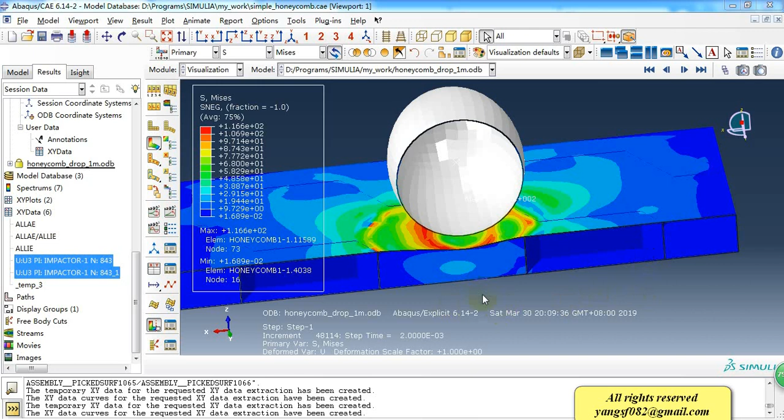Hello everyone. Today I want to share a simulation of the impact of honeycomb box. As we can see, this is a rigid object as impactor, and this box is a honeycomb structure inside.

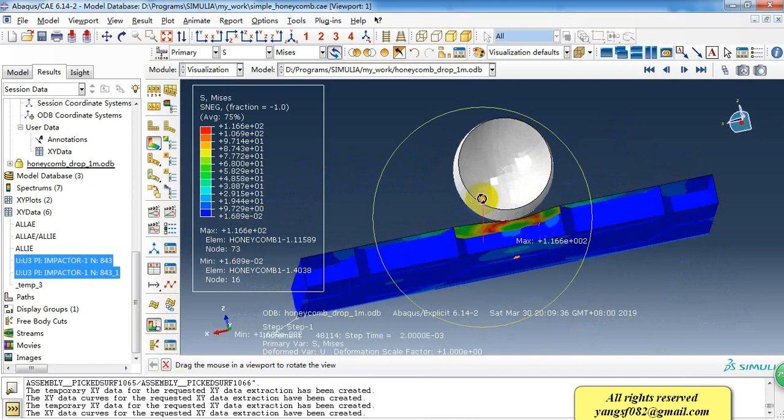And I can show you the inside structure. So this is the deformation and the stress distribution. Then let me show you how to create this model and simulation.

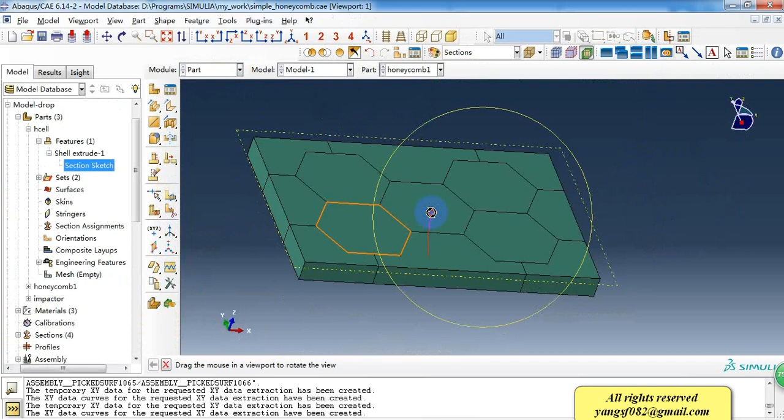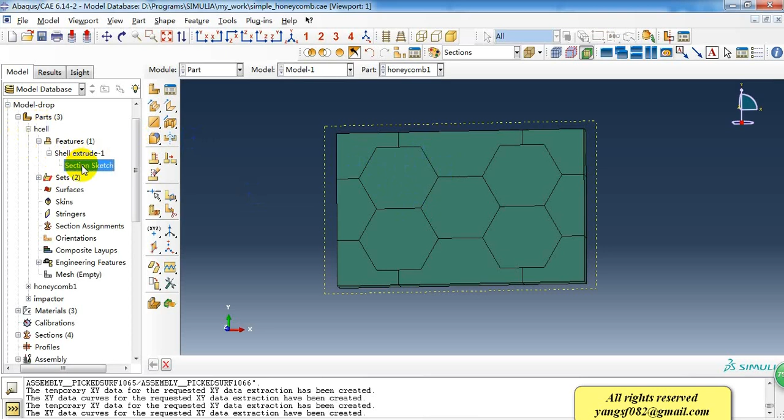So this is a part, and how to create this part, I can tell you the steps. First, we need to create a unit of the polyhedron. So this is the unit, and here is the sketch of the honeycomb unit.

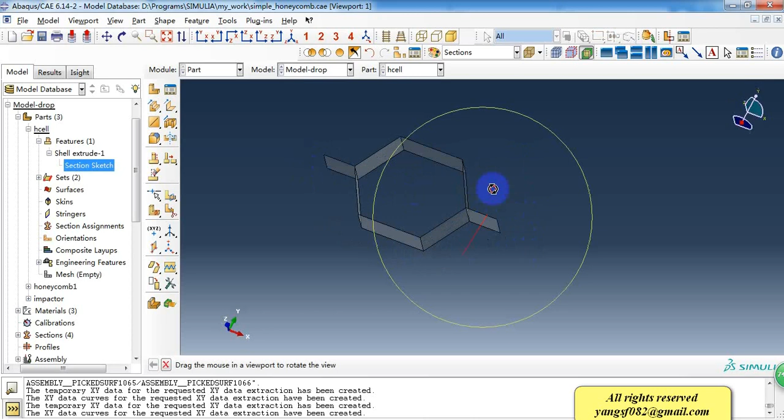And the dimension here. So we use the extrude tools to create this surface, and then we can make a merge of multi-units, so we can get this one.

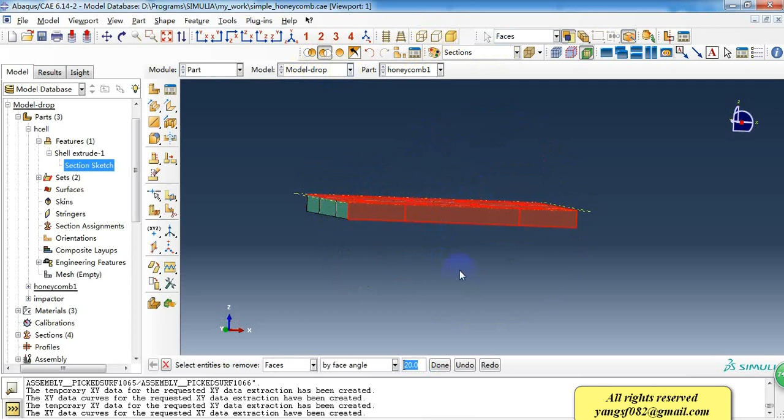Before I add the surfaces at the outside, it's just as this, and the thickness of the walls are different because we know how the honeycomb is made.

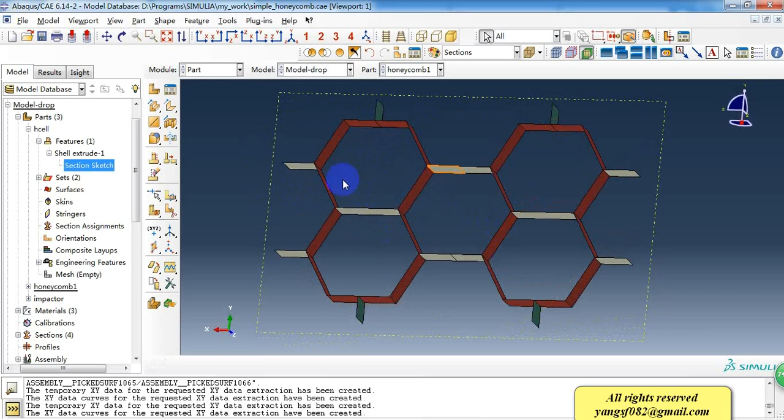So this wall's thickness is 2 times as this one, and I can show you the thickness of the walls.

And the thickness I can show you in this section. So this is a double wall, and this is single wall. The double wall is 2 millimeters, and the single wall is 1 millimeter.

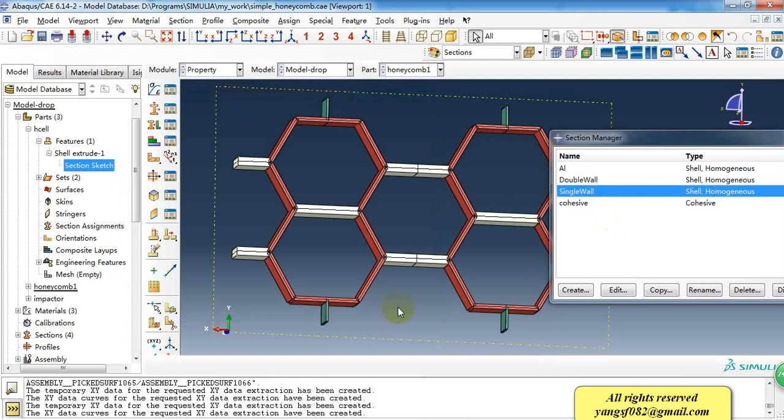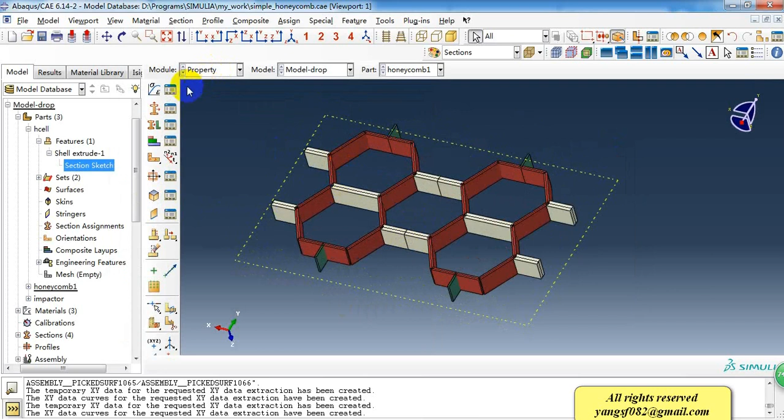After we get this honeycomb, then we need to create the outer surface. So first of all, we need to extrude the outside wall. So that's the step here.

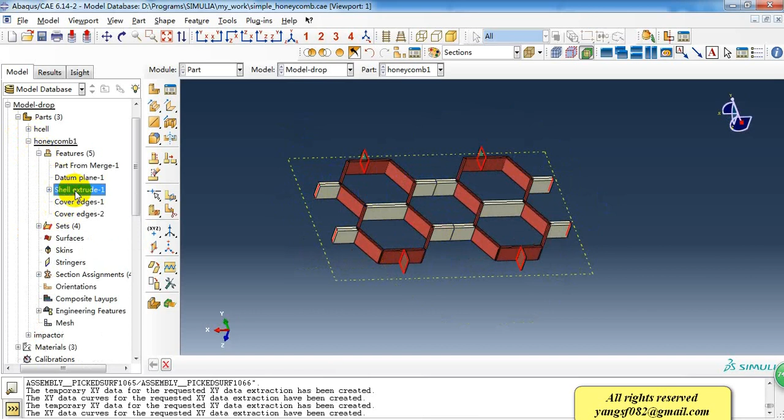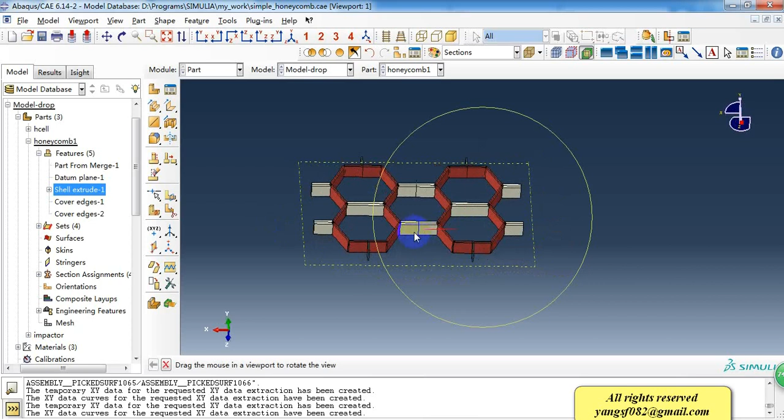In the sketch, we create a rectangle as the outside wall and extrude it for 6 millimeters, the same height as the honeycomb. After this, we need to create the top and bottom surface.

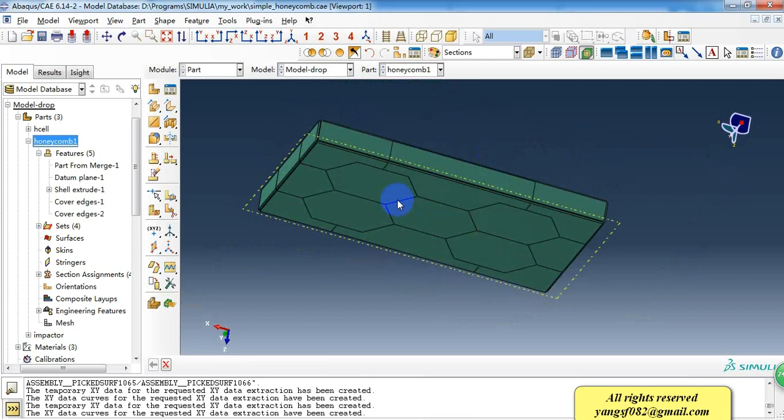We can create the surface by this tool, Cover Edges. After we created the top surface and bottom surface, then it is a closed box, and inside is the honeycomb structure. So this is the honeycomb box.

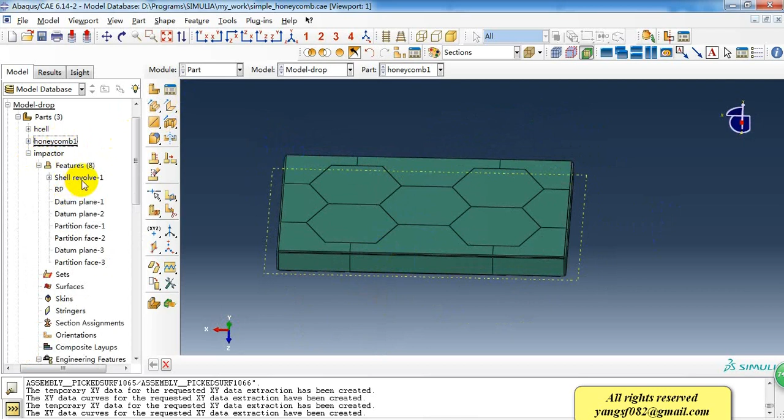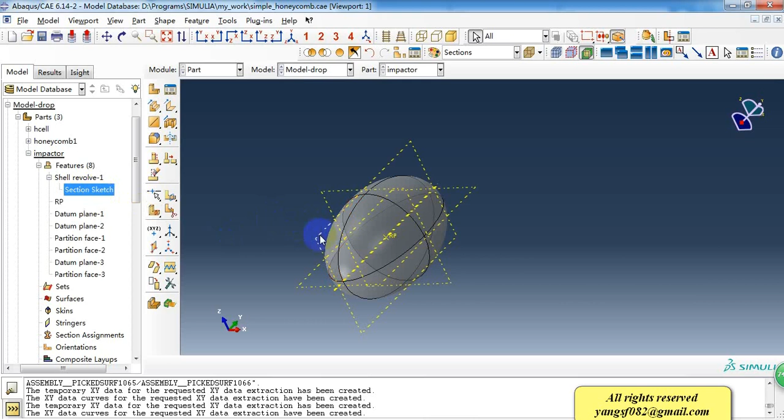Then we create the impactor. It is an ellipse, so I need to revolve it to get the sphere body. And the long axis is 30 millimeters. After revolving for 360 degrees, then we get the closed surface, and we create it as a discrete rigid.

So we need to give it a reference point here. Then to get the uniform mesh, we cut it with 3 planes. So we create the 3 datum planes.

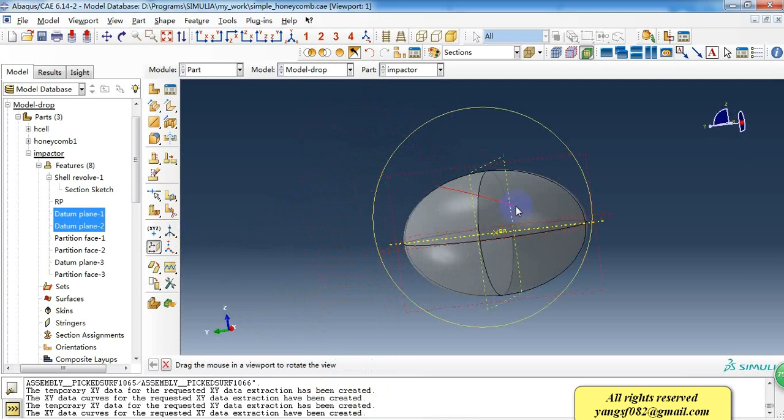As we can see, these planes can be created by these tools. So after we cut it into 8 parts, we can get a better mesh, as we can see.

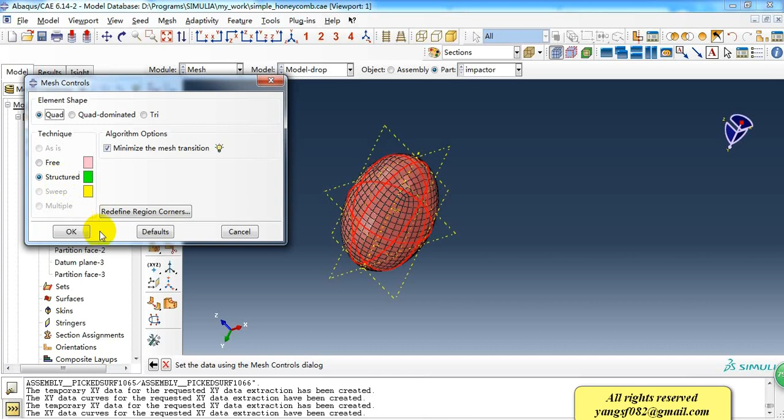And for this rigid sphere body, we can get a structured mesh. And the mesh size is about 1.5 millimeters.

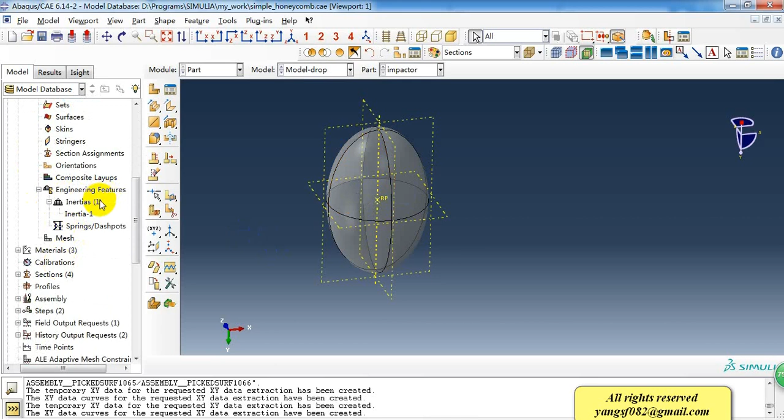Because it is a rigid body, it needs a mass for this object. So I give it engineering features, inertia. And for this reference point, it has a mass of 0.05 kilograms. It's just almost the mass of an egg.

So these are the 2 parts. Then we need to create material. Here we create 2 materials. And the first is the aluminum density and plastic property.

The yield stress is about 120 megapascals.

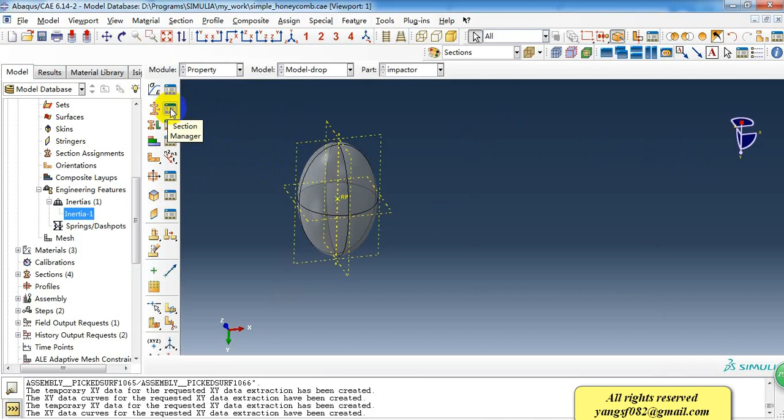So after we create these 2 materials, we need to create the sections. Because these are all shell sections, we need to create different section properties for different thickness.

As we can see, the aluminum has a thickness of 0.5 mm, and the double wall of the honeycomb is 2 mm, and the single wall is 1 mm. These are the three section properties we need to use.

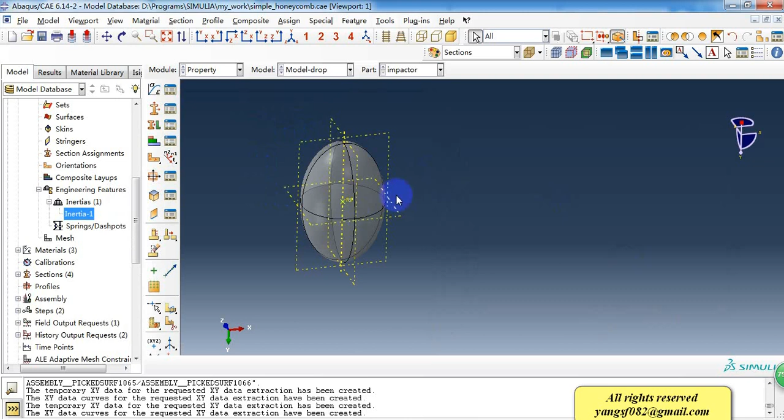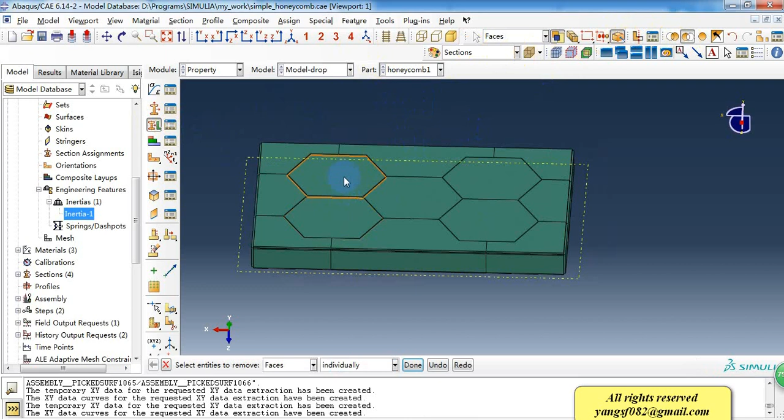Then we need to assign the section to different thickness surfaces. So I can hide this top surface to see the inside thickness.

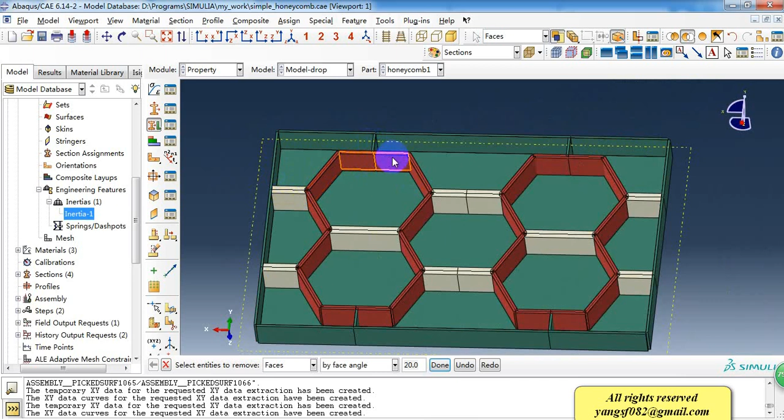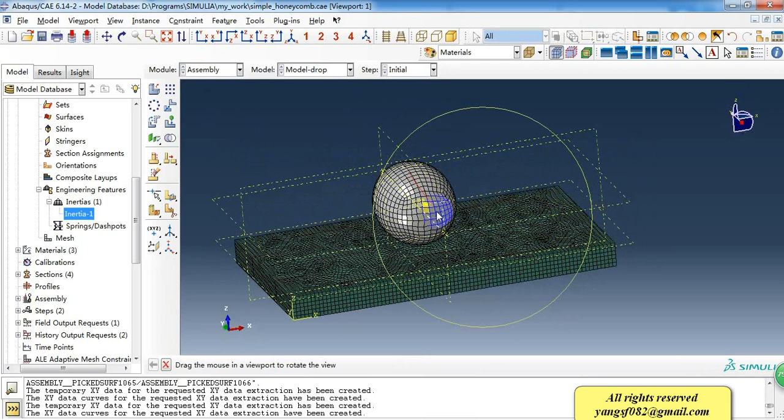After we assign the section property, we go into the assembly module. In this module, we need to adjust the location of the two parts and make it the initial position of the simulation.

Then we create a dynamic explicit step, and the time period is 2 milliseconds.

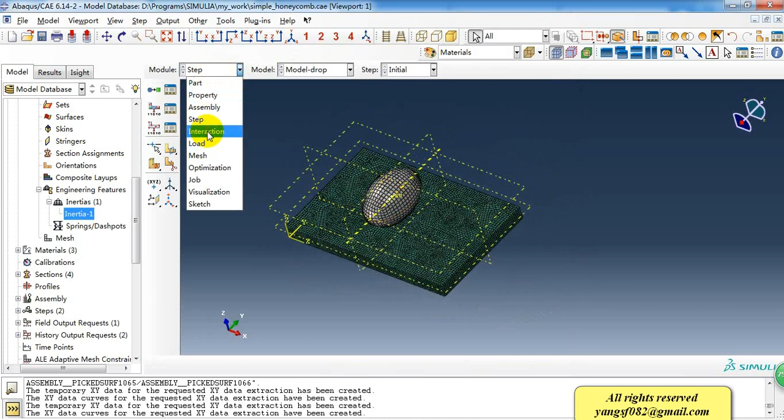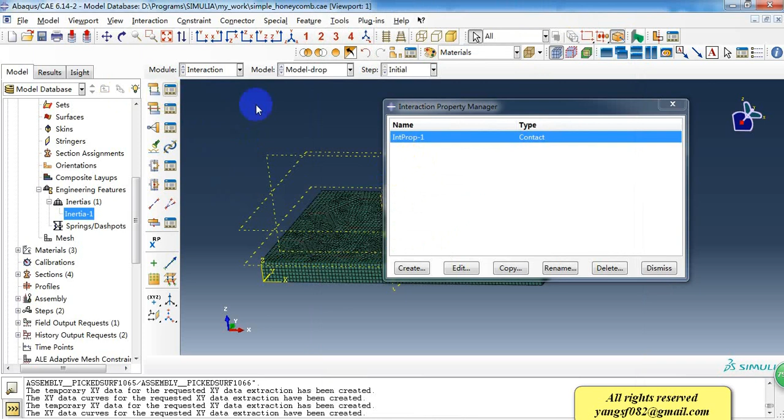Because there is a contact in the process of impact, we need to create a contact property with a friction coefficient of 0.5, and we create a surface-to-surface contact interaction. The rigid body has a master surface, and the top surface is the slave surface.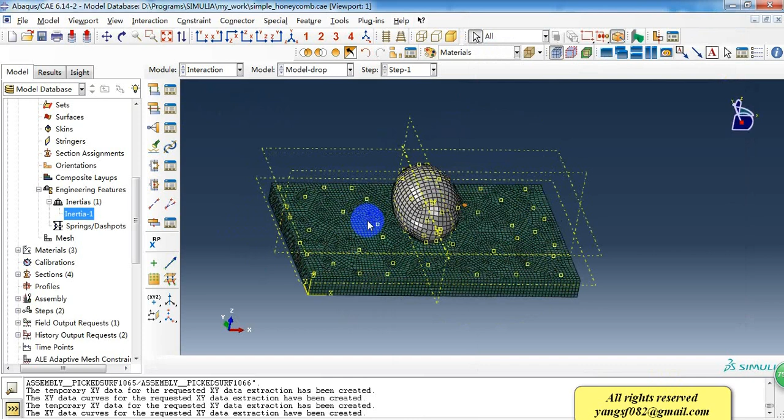Then in the result, I want to know the contact force or the impact force between the impact. So in that step, I create a history output. At the domain, I choose the interaction, and it has the Int-1. Here I choose the CFN, the total force due to contact pressure, the total area in contact, and total forces due to frictional stress.

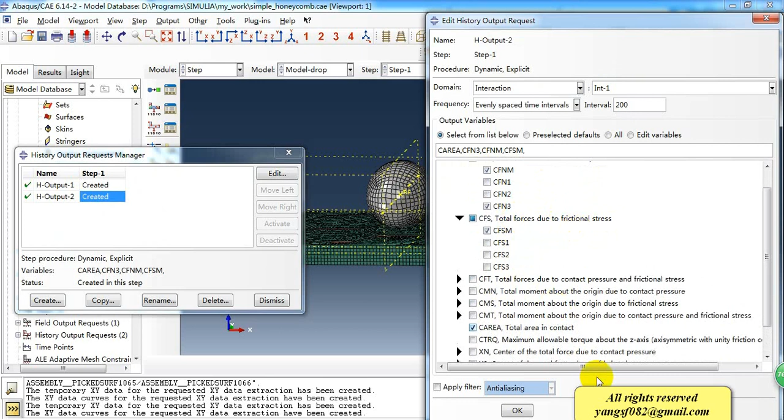So after we define this history output, we can check the contact force in the result.

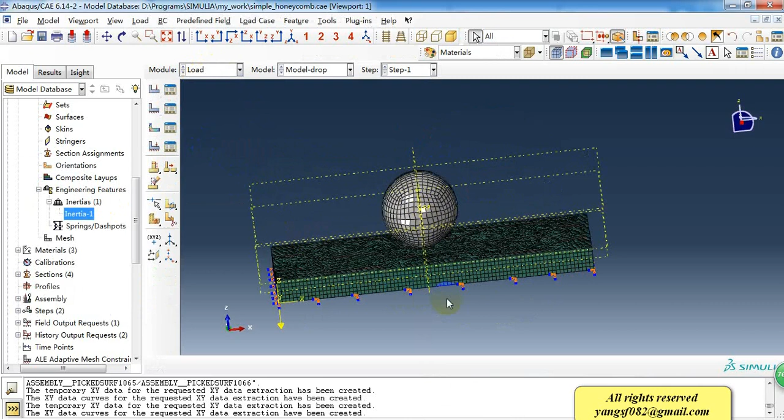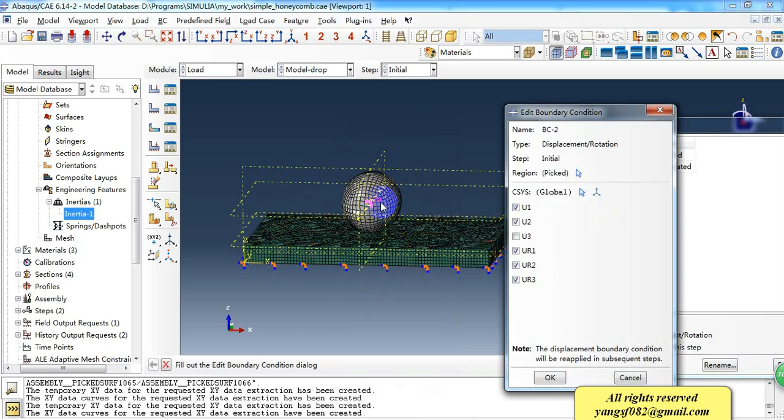So in the load module, I need to fix the 4 edges of the box and give the rigid body an initial velocity. First we fix the 4 edges of the honeycomb box, and second is the rigid object, and we constrain the freedoms except the U3.

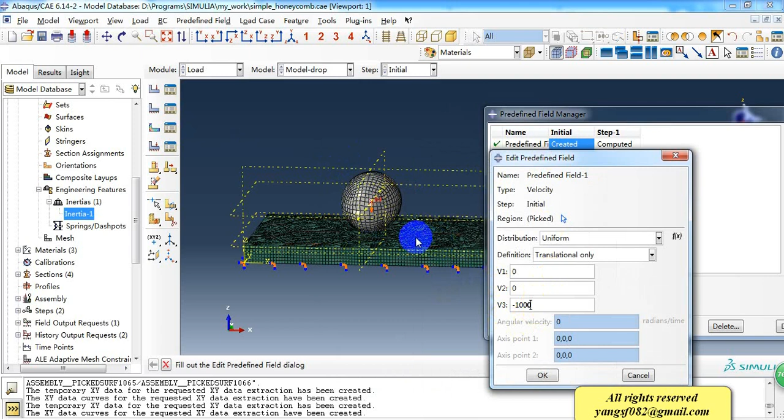And we give it an initial velocity. In this case, we give the velocity in the negative z direction, as 1000 millimeters per second. Of course, we need to give this model gravity here.

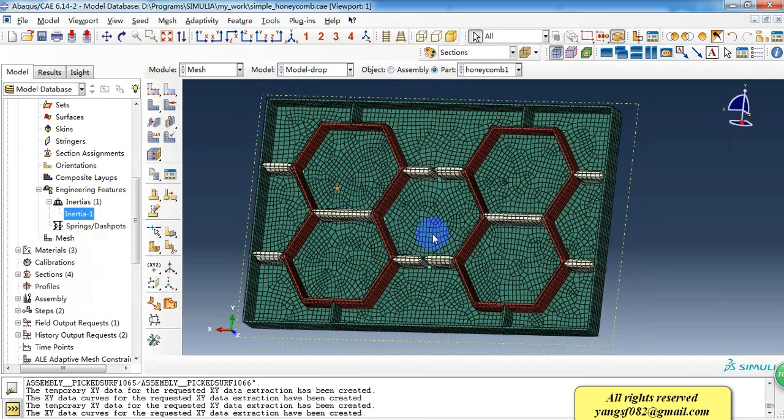Then we create the mesh for this honeycomb structure. We give the mesh size of 1 millimeter, and to get a quad shape element.

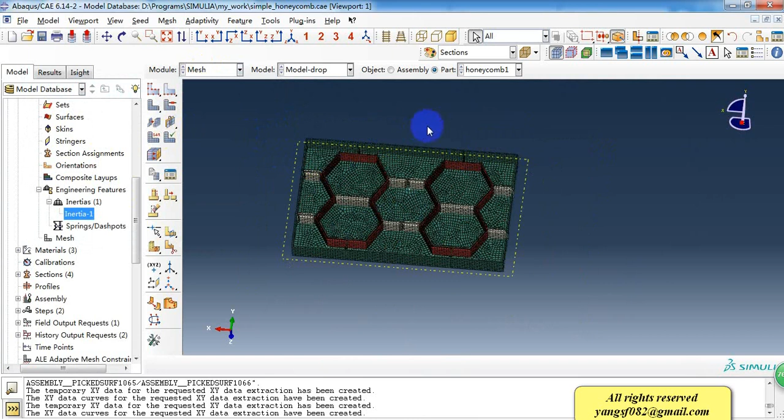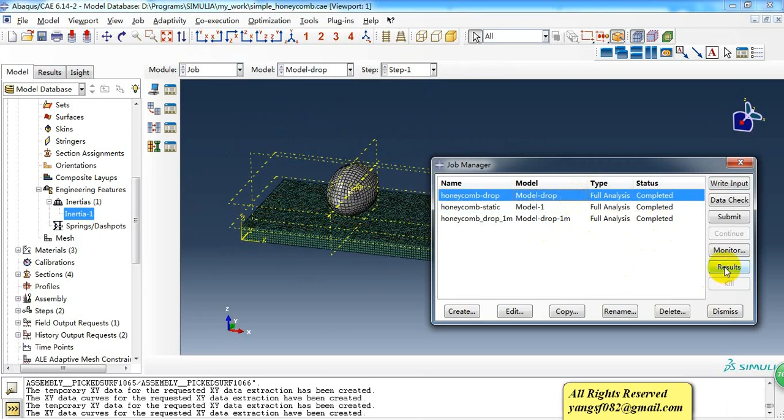After all of this, we create a job and submit it. It will solve in about 20 minutes. So I can check this result.

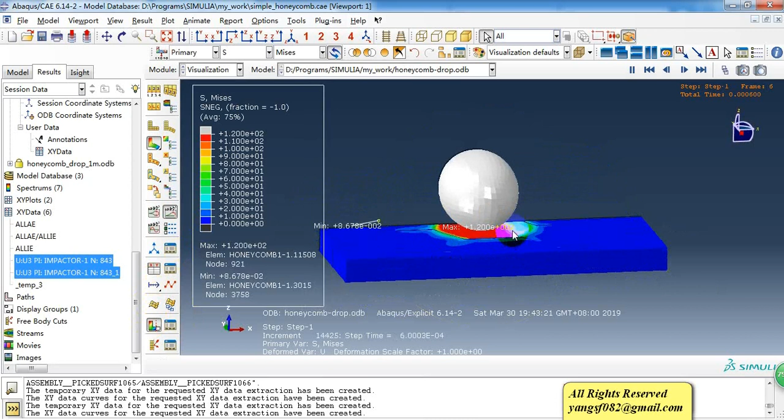Here is the stress, and we can show the animation. As we can see, the aluminum in the center part of the top surface has yielded.

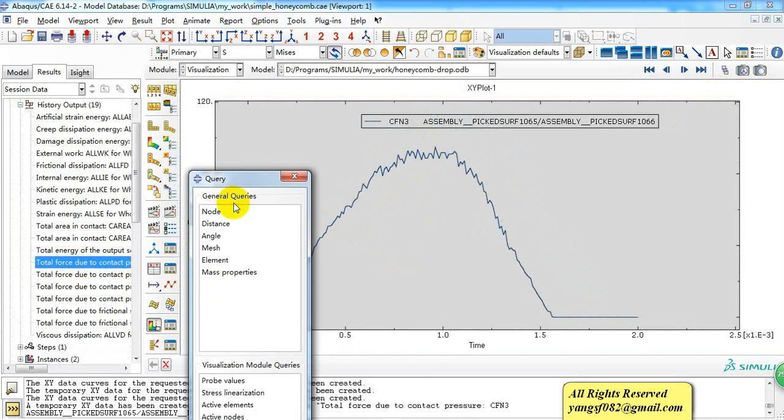And we can get the contact force curve here, and the max contact force is about 95 newtons here.

And we can also create the curve of the displacement of the impactor here. This is the reference point of the impactor.

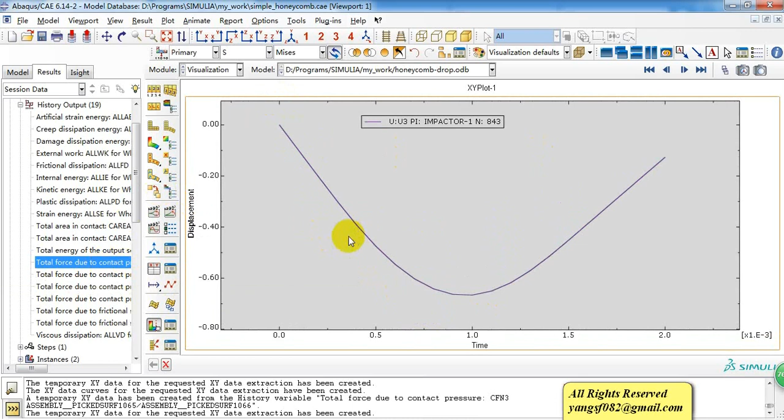We can also check the energy curves. The blue curve is the internal energy, and the green curve is for the kinetic energy. At first, the kinetic energy is about 25, and the internal energy is 0. Then, when the contact happened, the kinetic energy converted to internal energy.

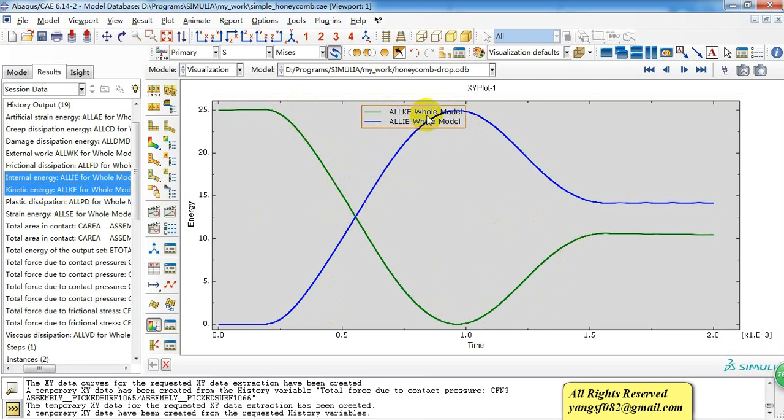Then we can check the contact area. The max contact area is about 27 millimeters square.

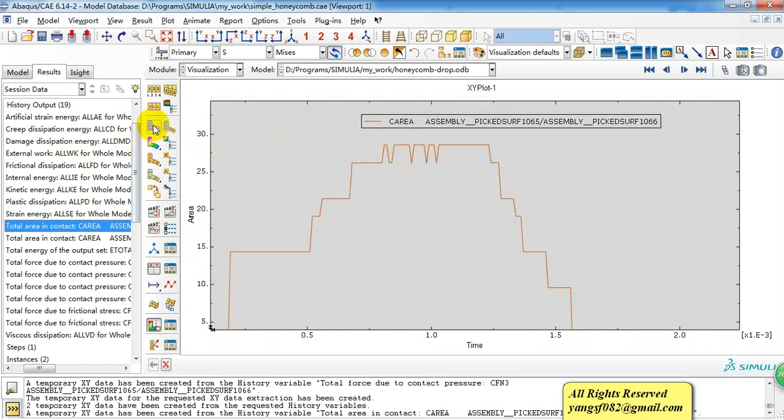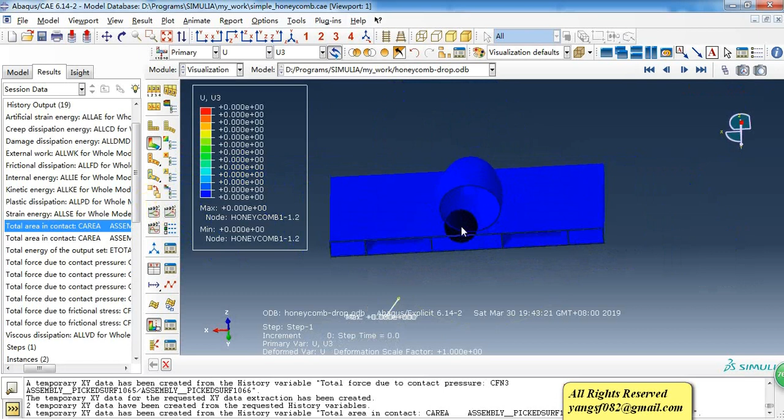We can check the displacement. So this is when the impact velocity is about 1 meter per second.

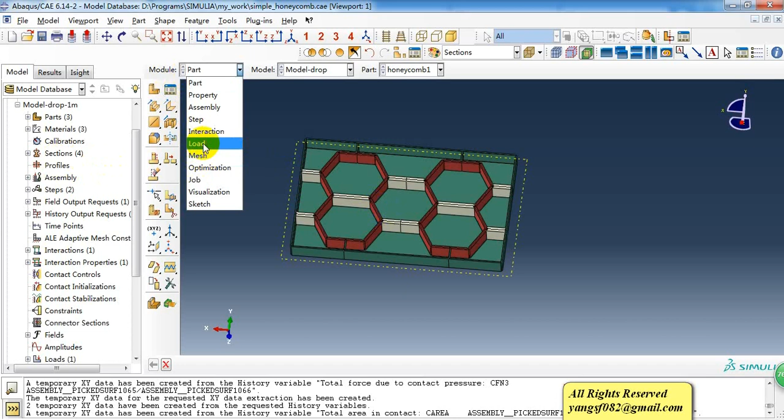Then I copied this model and changed the impact velocity to the velocity when it falls from 1 meter height. So then the initial velocity will be 4.43 meters per second in the negative z direction. And the other conditions are the same.

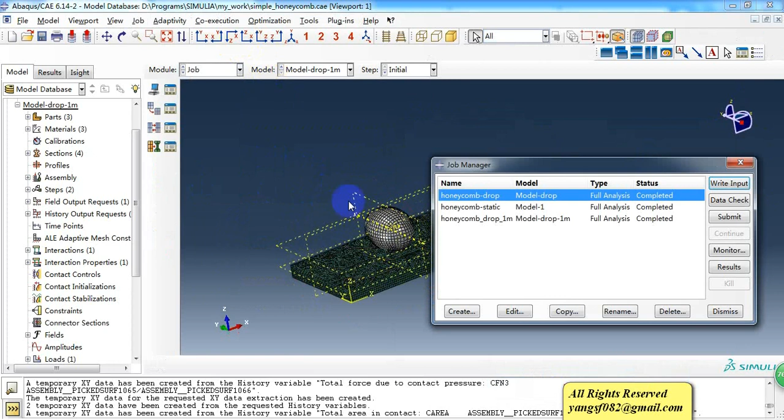Then we also solve this problem. So here is the result. As we can see, the erosion is larger than before.

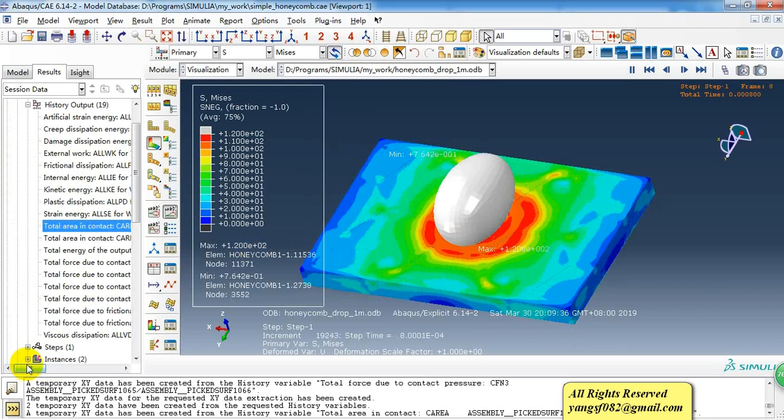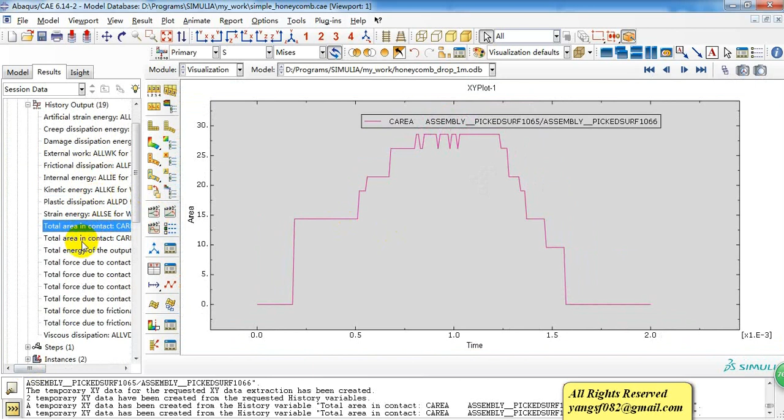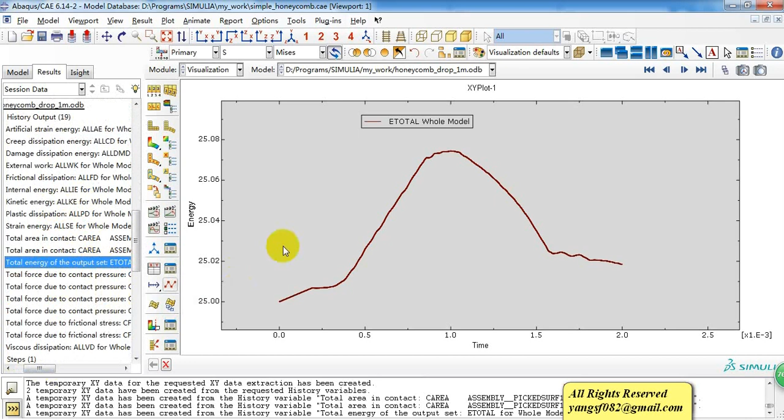And we can compare the contact force curve. This is the contact area. We need the force... let me check the other one. This is the force.

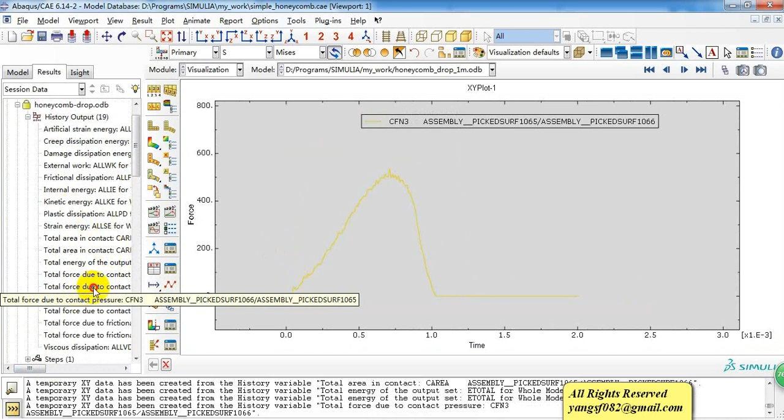So the red curve is when the initial velocity is about 1 meter per second, and the yellow curve is when the velocity is about 4.2 meters per second. As we can see, when the velocity increases, the response time is shorter, but the contact force is larger.

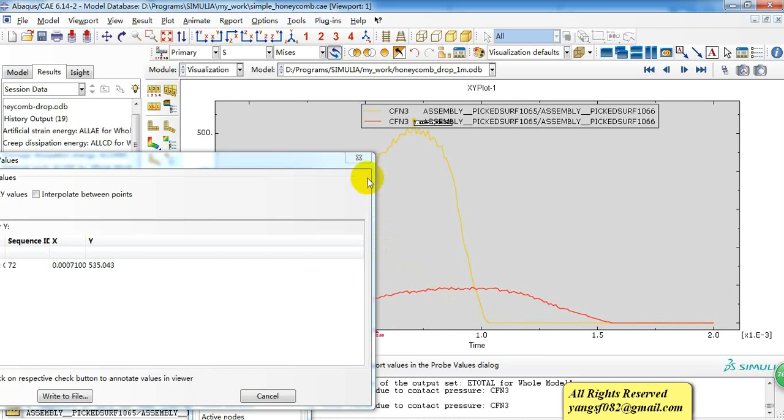So we can check the value: 535 newtons, and the first one is about 95 newtons. It's about 4 times, 4.5 times.

And we can also compare the other curves I have created here. This is the displacement of the reference point of the impactor. We can guess without doubt the yellow curve is for the first model and the red curve is for the second model, because when the velocity increases, the displacement gets larger.

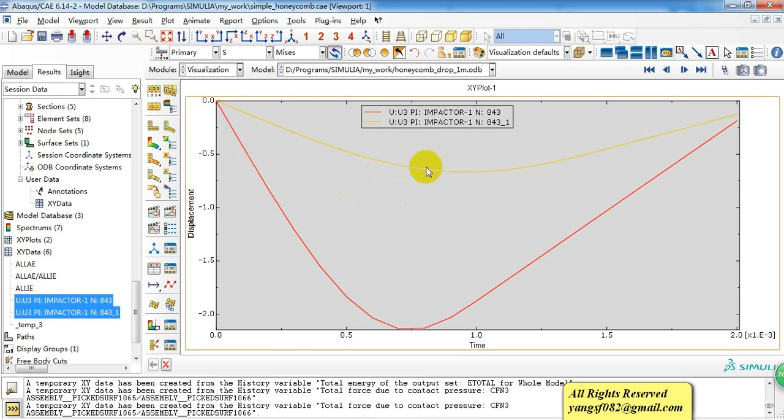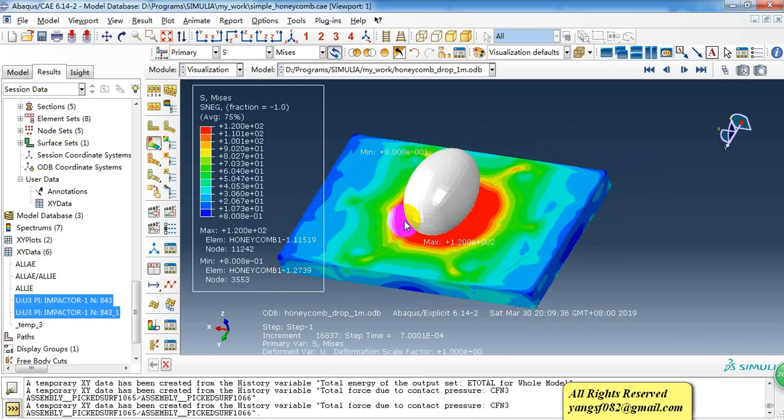Of course, we can check other results if we want. This is the contact pressure.